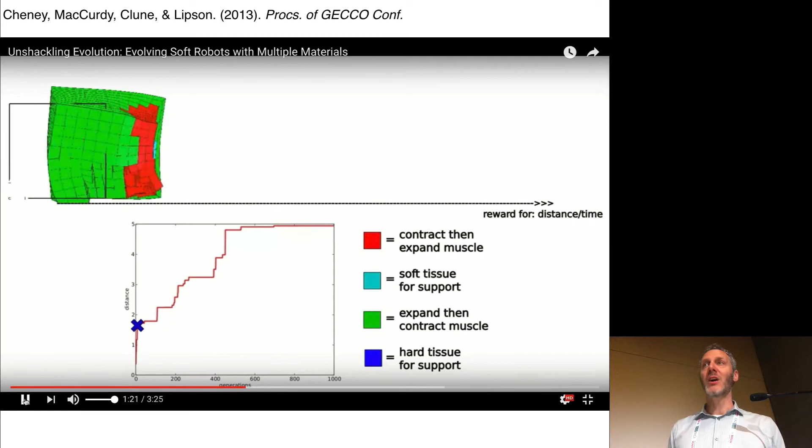In all the work you're going to see here, we work in simulation. This is the VoxCad Simulator, and as you can see here, VoxCad takes a finite element approach to simulating soft robots. Robots are simulated as aggregations of 3D pixels or voxels. In this early experiment, each voxel belongs to one of 4 types. You can see the red and green voxels here. These voxels are controlled by an open loop controller that oscillates the volumes of red and green in antiphase. So these are kind of like muscle.

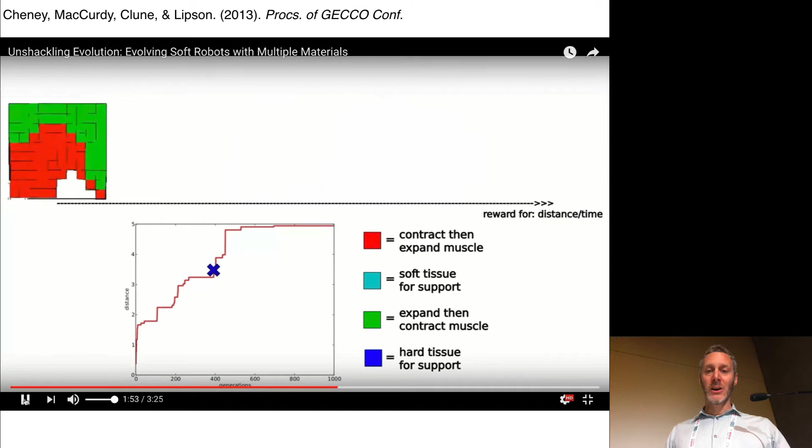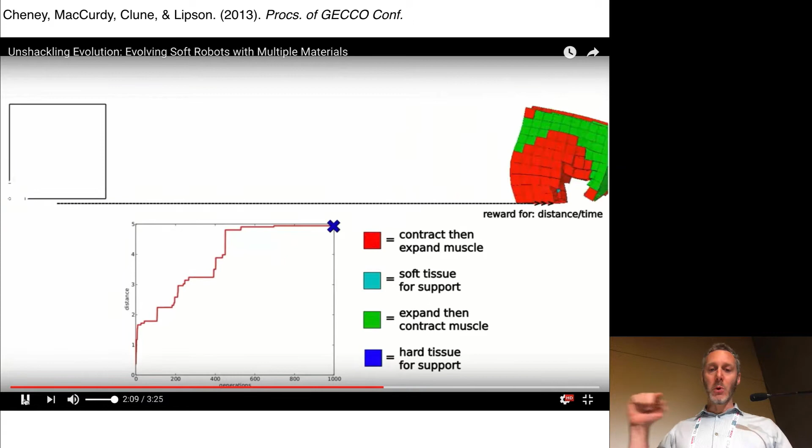If you look carefully, you'll see a light blue voxel, which is passive soft material, the robot analog of fat. And if you look carefully again, you might see in a few of these robots some dark blue voxels, which is passive rigid material, the soft robot equivalent of bone. So what you're watching in this video is a snapshot throughout this evolutionary process where you see the best robot in the population at any given time.

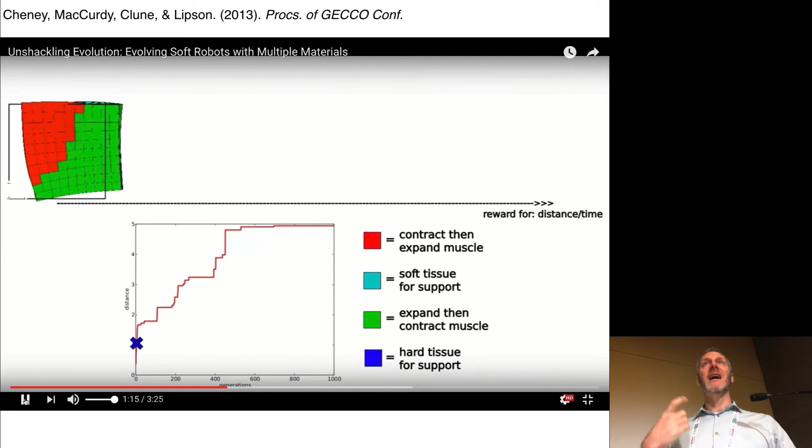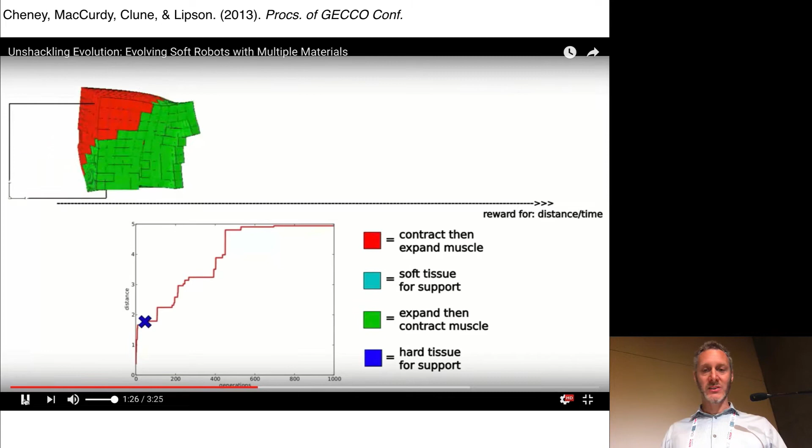So we have a population of these machines, and the evolutionary algorithm is designing the geometry and the distribution of material across the body plan of these robots. And I'll talk a little bit more about how this works in a moment. So that's evolving soft robots, as Fumio mentioned. And also, like Fumio showed you, how do we move forward with this idea of protean machines?

So evolutionary robotics usually gives us changes in morphology and control over evolutionary time, but any one robot usually has a relatively fixed morphology and controller. So how do we evolve protean machines, machines that themselves change morphology and control over their lifetime?

Well, as always, Mother Nature has already figured out how to do that, and she does that using the process of evo-devo, which is short for the evolution of development. So in nature, evolution doesn't produce a fixed blueprint. Evolution dictates how a morphology grows from an individual cell into a multicellular organism.

And in evo-devo, you can then look at an evolving population at 3 different time scales. You can look at the second or minute time scale and describe the biomechanics or the learning of a machine, how it's actually coordinating its behavior in its ecological niche.

At the middle time scale, you can watch the lifetime of an organism or a soft robot, as you'll see in a moment, and describe how the morphological and nervous control, the neural system of that organism changes over its lifetime. And then finally, at the evolutionary time scale, you can look at how evolution changes the developmental trajectory of organisms. So we have behavior, devo in the middle, and evo at the bottom level.

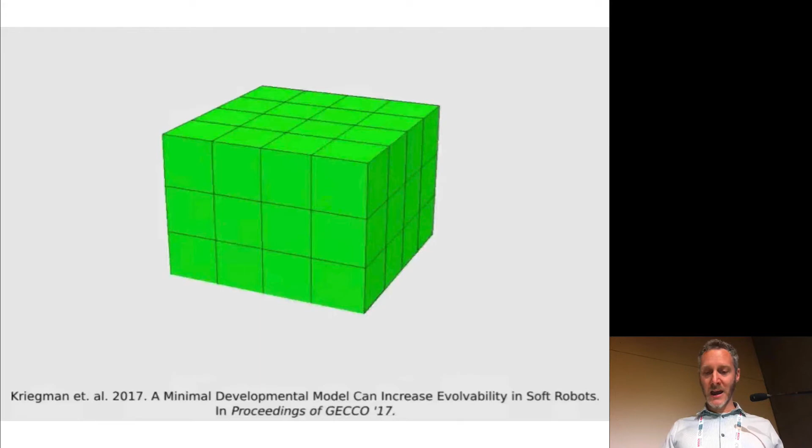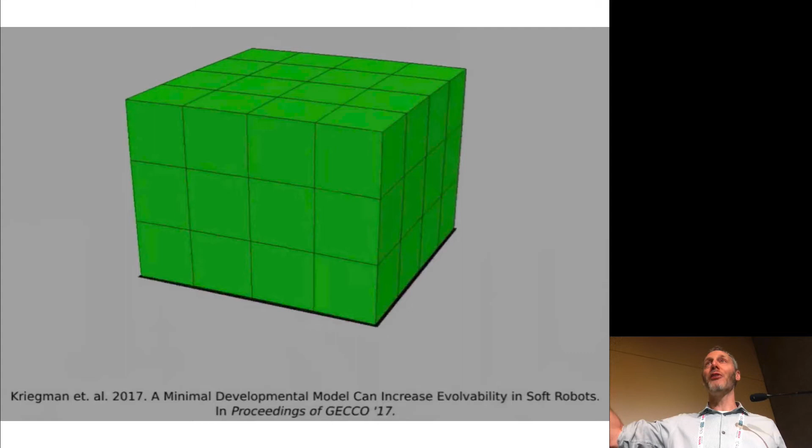The simplest thing you can do is start with a set of voxels, and then we use an open loop controller, where in this case, all of the voxels are expanding and contracting in phase. So we have a fixed open loop control. This is the here and now time scale. As you can see, with just this morphology, this robot doesn't do a lot.

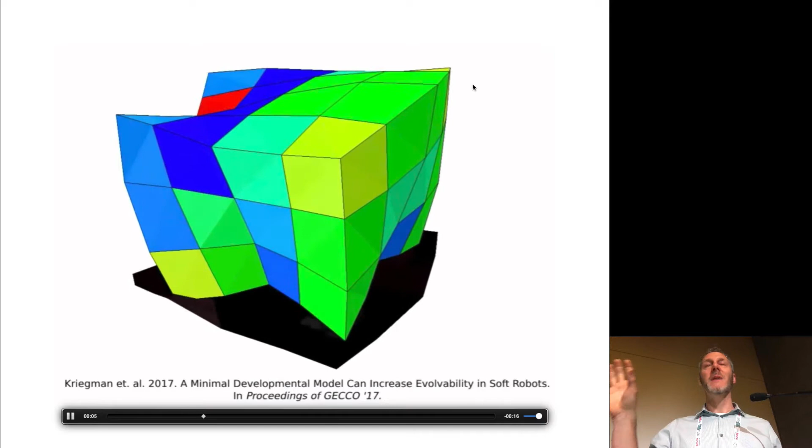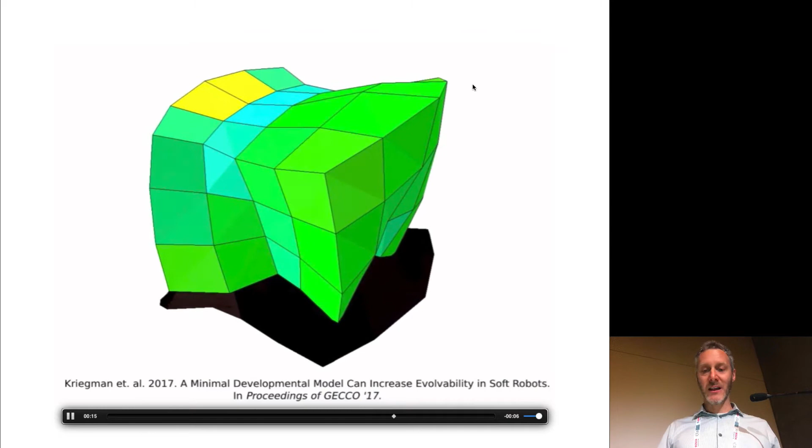We then paint on top of that a developmental trajectory. So in this case, you can see that some of the voxels are expanding and some are contracting. So this robot is growing or developing over its lifetime. If we take the open loop controller and combine it with this developmental program, you'll get the following.

You can tell that this is a robot that was evolved for forward locomotion. If you watch carefully, you'll notice over the lifetime of this robot, there are short periods in which the robot moves quickly and short periods in which it moves slowly.

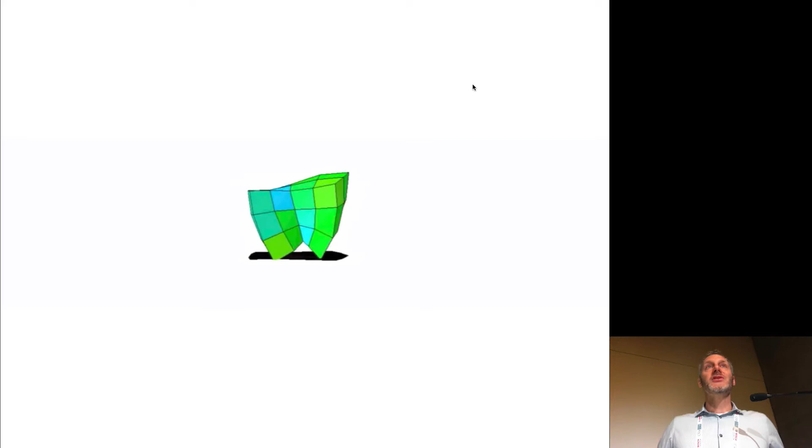So we've combined 2 monotonic processes, the constant frequency of the open loop controller with the constant expansion and contraction of the developmental trajectory. And by putting those 2 monotonic processes together that operate at different time scales, I'll just start this video again, you get positive interference.

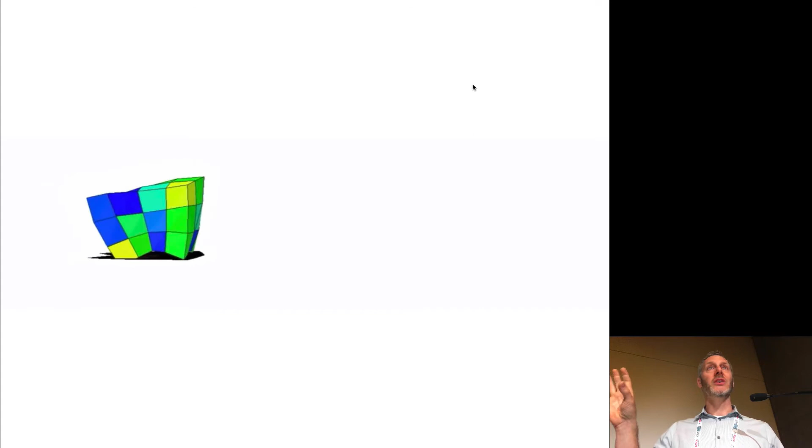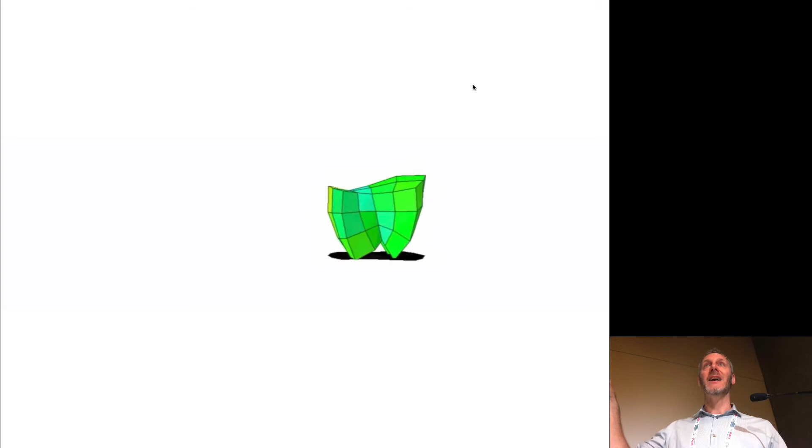There are periods during which those 2 timescales synergize and the robot goes quickly, and other periods in which there is negative interference and the robot slows down. Why does that matter? It matters because usually when we're evolving these robots, we're looking for a needle in the haystack. So we're looking for a very small subset of the entire space of robots in which that robot can exhibit the behavior of interest. In this case, it's rapid locomotion.

If you have a robot that's changing over its lifetime, if you have a machine that's protean, you have a much higher likelihood of passing over the needle in the haystack. You're much more likely to produce a robot that, at least during part of its lifetime, exhibits the rudiments of the behavior you're after. It might lose it, but as long as it shows up for a short period of time, evolution can then subsequently mutate descendants of that robot and expand the period of time during which the needle, so to speak, is exhibited. So that's why Devo is useful.

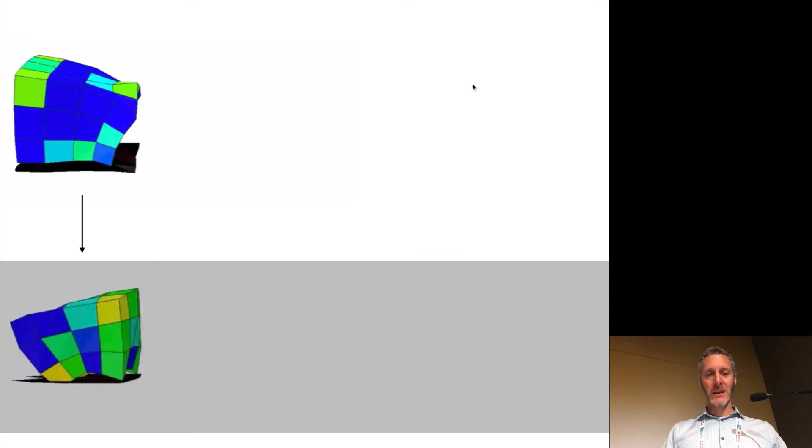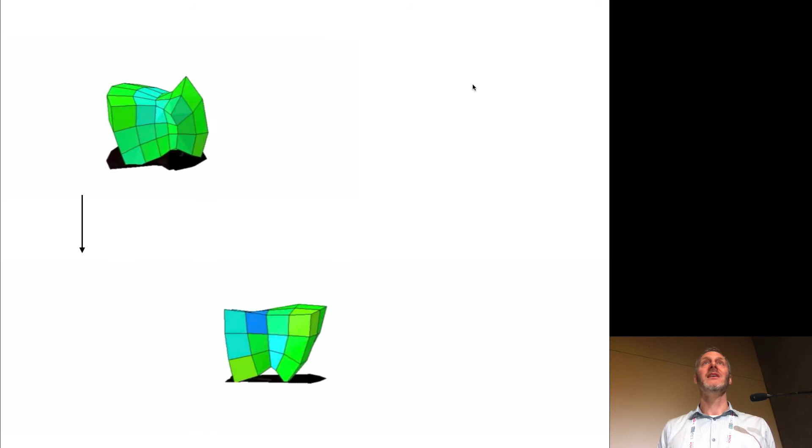I'm now going to go to the third time scale, evolution. So you can see in the top row here, this is an ancestor, and you can see a descendant of that ancestor in the bottom row. The only difference between these two robots is they have different Devo. They have two different developmental trajectories. In the top case, the needle was discovered. There was a short period during which the ancestor moved quickly. And in the descendant, that particular body plan that gave rise to rapid locomotion has been lengthened throughout the length of the lifetime of the robot.

I'm going to show you a second project now. This is more recent work by Francesco Corucci and Cecilia Laschi. This was a collaboration to extend this idea. In this case, every robot is made up of two CPPNs. Remember that a CPPN paints regular structure inside of a space. The first CPPN is going to paint the morphology, the geometry and material properties of the machine. And the second CPPN is going to paint a controller onto that robot. In this case, we still have a relatively simple open loop controller. It's going to paint a particular frequency and phase offset onto the active parts of the robot.

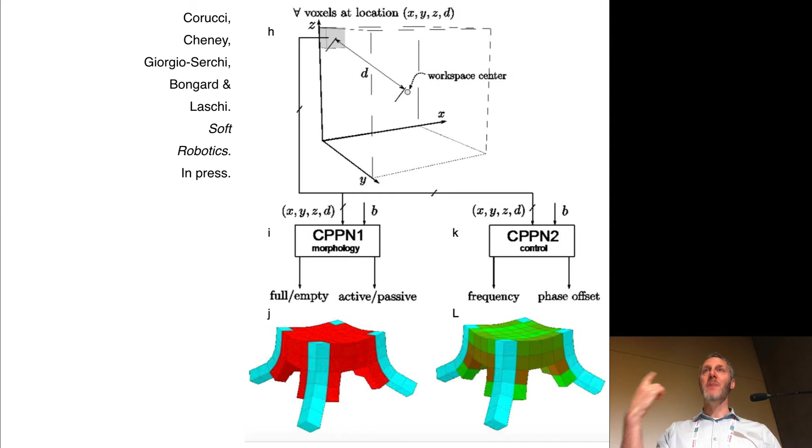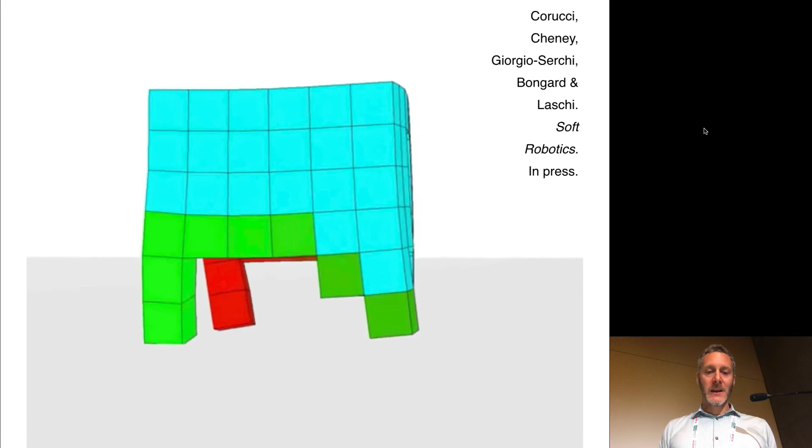In this simplified case, the red voxels are going to be active parts of the robot, and light blue is passive soft structure. Okay. This paper is currently in press at the Soft Robotics Journal. It will be out shortly. Here is one evolved robot. You can see that the majority of this robot is actually passive structure. You can see now the patterning of red and green is showing the phase offset of the open loop controller. You can see that the minority of this robot is active material.

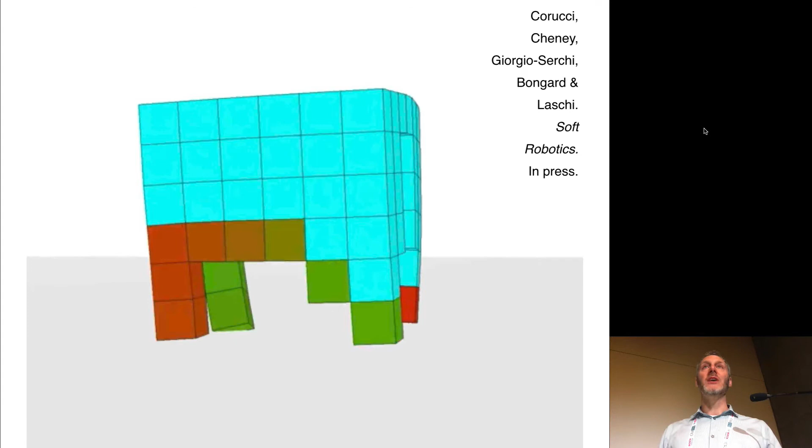So this is in some way the soft robot equivalent of passive dynamic walking machines, if you remember those, where basically evolution is again exploiting the morphology and the material properties, in this case, to achieve quadrupedal locomotion with relatively little and simple control. Okay, so we now have a robot that's changing morphology and control.

I'm going to move on to the third project now, which is, again, a more recent application. This is work together with Sam Kriegman again and Francesco Corucci from Cecilia's lab. When I showed you Devo before, I was showing you what's known as ballistic development. Ballistic development means that the developmental program will unfold in the organism or the robot, regardless of what's going on in the organism or robot's environment.

In this third and final project, I'm going to show you environment-mediated development, which means as the robot performs its behavior in its given task environment, environmental signals can change the way the robot develops, which is the sort of standard way development occurs in nature.

So how did we switch from ballistic development to environment-mediated development? We made a very small change to the previous project. Again, each robot is designed by a morphology CPPN and a control CPPN. In this case, we've added a third output neuron, again, to the CPPN that paints the morphology.

This third output neuron is going to paint a coefficient onto an ordinary differential equation, which you see in the bottom left. And this ordinary differential equation is going to dictate for each voxel how its stiffness changes in response to stress, engineering stress in this case. The coefficient is going to dictate how that voxel changes its stiffness in response to stress.

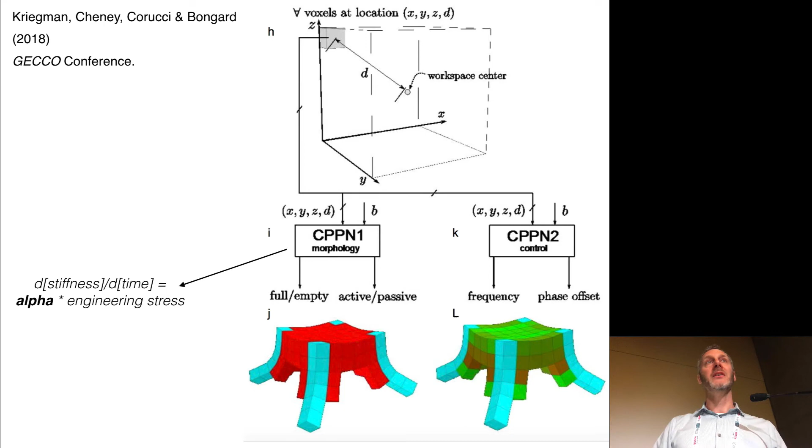So in essence, what this third output neuron is doing is painting different coefficients in a set of ODEs distributed across the body of the robot. Okay, so I'll show you now a video to show you how this works. We're going to be reporting this work next month at the Evolutionary Computation Conference, GECCO.

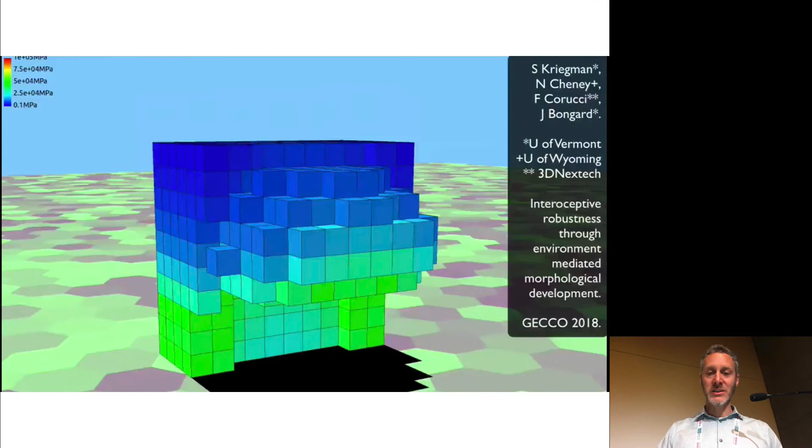In this video, the color is going to indicate at that given time the stiffness of that voxel. And you can see already at the beginning of the lifetime of this robot, there's already a continuum or a gradient of material properties across the robot's body. In this video, watch the front foot, if you like. It starts relatively soft, and as it moves, that part of the body becomes stiffer.

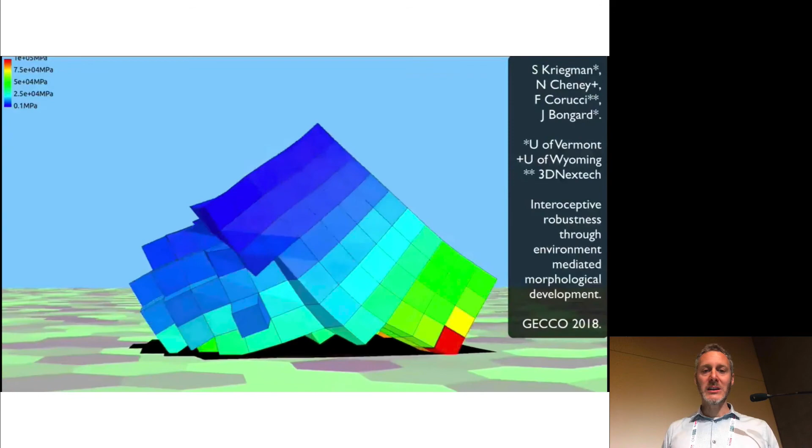And it turns out that for this morphology, there is much more engineering stress at that point than at other points in the body. And that voxel has evolved a positive alpha, meaning that it stiffens in response to increased stress. Elsewhere in the body, you'll see, particularly at the top of the body, there is a lot of soft material, and the robot is in essence sort of literally throwing its weight around as it's moving. So there's relatively little stress at the top of the body, and that part of the body softens.

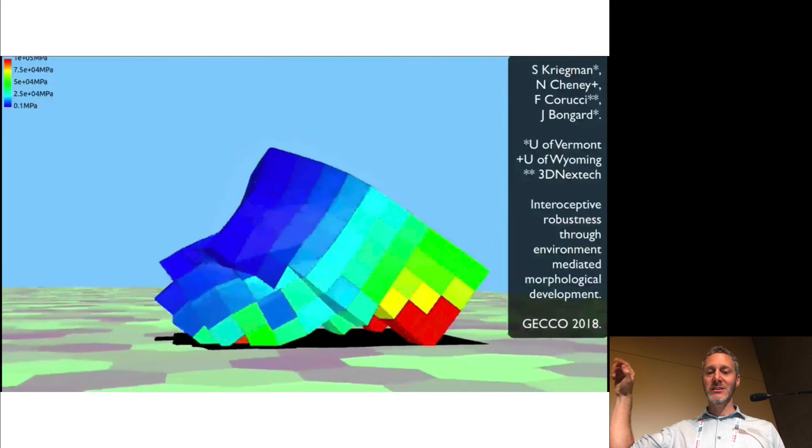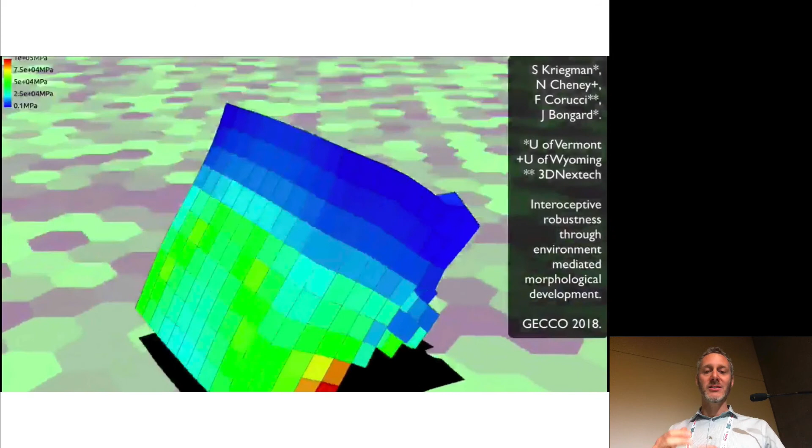If you look at the feet again, you'll see that the two front feet and the single back foot are continuing to stiffen. So in essence, it's building stiffer feet and using the soft upper part of its body to make its movement more energy efficient. So something like a flexible spine in the robot. So at different parts of the body, there are different changes in material properties, and this is all within one robot. There are other robots in the population that have evolved different developmental trajectories.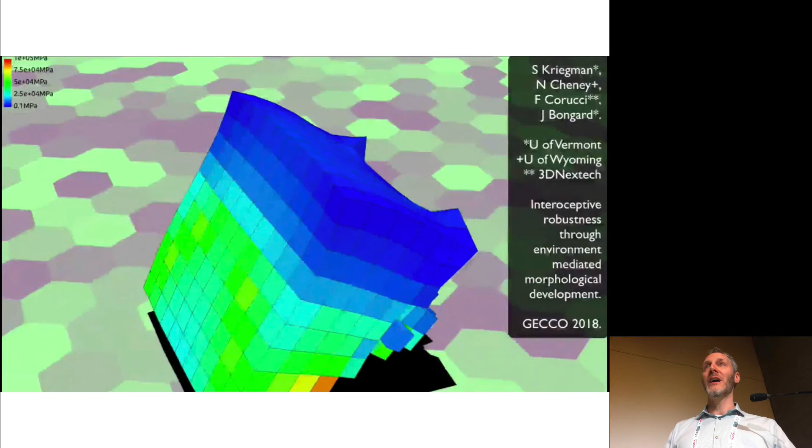So although relatively simple, we have all the basic pieces of Evo-Devo in here now. We have evolution dictating how a robot develops or changes its body in response to environmental signals.

Okay, all of this work, we've now put this up in a GitHub repo. My student Sam Kriegman has evosoro. You can go check out the GitHub repo. For those of you that are interested in simulating and evolving soft robots, this is a relatively easy way to get started before you move on to hardware. We've just put up this repo, so we'd love to get some feedback on it. Please do let us know whether it's useful for your projects.

Just to sort of summarize now, I've tried to argue for this idea of protean machines, where we focus on what the robots can do, which is change their form, and what opportunities that gives those machines beyond non-protean machines, which is that they can change their function more easily because they can change their form more easily. I've shown you some protean machines that can change their geometry. Here's another one that evolved.

This one is changing its geometry as well, and by doing so, it changes from a walker into a roller. So this is not a walking machine, it's not a rolling machine, it's a protean machine. As it changes its body, it's able to exhibit different behaviors under different conditions. We could also, for example, change the topology. We can connect or disconnect these machines together, somewhat similarly to what Fumiya showed you.

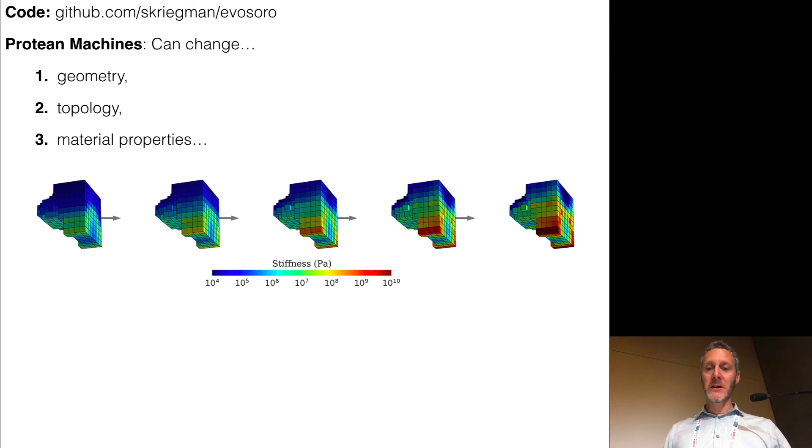This has been the goal of modular robotics for a long time. So we can also change not just geometry, but also topology. We can change the material properties, as I just showed you. This is a robot that grows calluses on its feet. And of course, we can also change the control of the robot.

Up to this point in robotics, it's been very difficult to change morphology of physical machines. So there's been a lot of emphasis on optimizing controllers for fixed morphology robots. One of my hopes for the field of soft robotics is as it becomes easier to change the body of soft robots, either in simulation or reality, we can broaden our thinking about adaptive processes from just learning to development in general.

What are some of the opportunities and challenges? By incorporating development, or this protean nature, it actually makes it easier to evolve these machines. Recall that this machine is evolved and it's speeding up and slowing down over its lifetime. So those slight and intermittent increases and decreases in fitness provide a lot of rich material for evolution to work on. For most robotics applications, what we want the robot to do is a very, very small subset of the entire design space. And by incorporating development, we make it easier for evolution to find those needles in the haystacks.

An opportunity, I think, for the field of soft robotics is to really convince our non-soft robotics colleagues that there really are things that protean machines can do that non-protean machines cannot. This is, again, some work together with Nick Cheney and Hod Lipson. We published a few years ago, demonstrating evolving soft robots to escape through very small apertures.

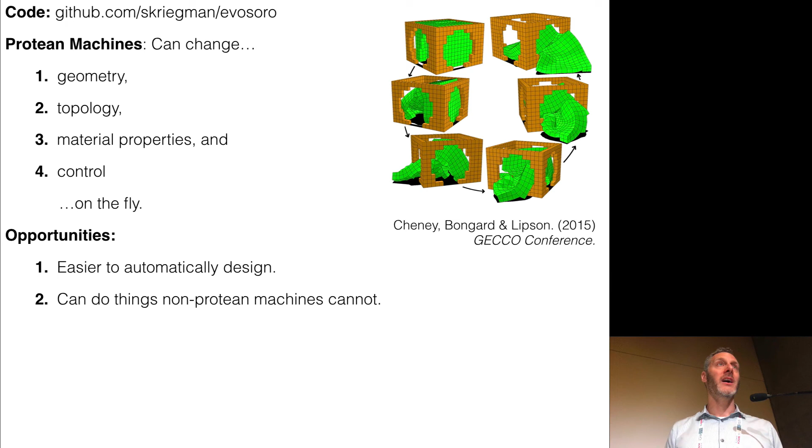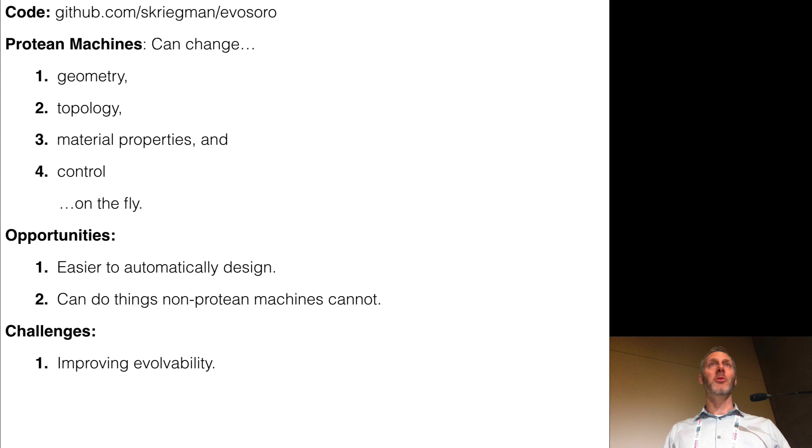A challenge here is to, again, improve evolvability. I've argued that Devo helps, but we still have a long way to go. As Fumiya mentioned, we need to perform a lot of evaluations to find or discover a robot that does what we want it to do. There's a lot of work to be done on the evolutionary algorithm and machine learning side of things to more efficiently discover useful soft robots in the overall design space.

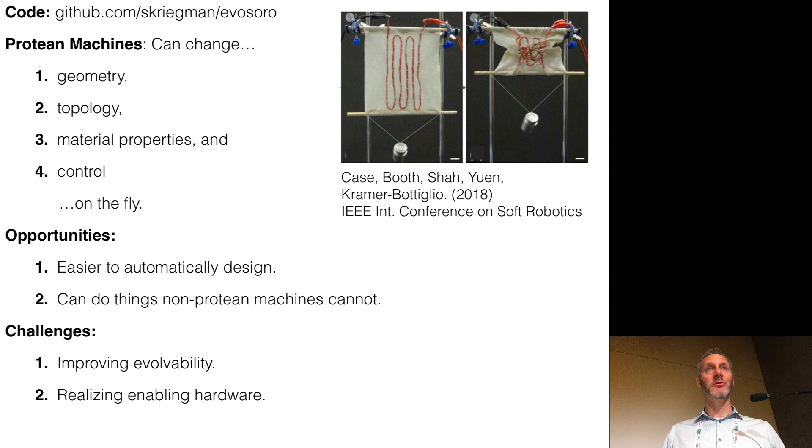Realizing these simulated robots in reality remains a challenge. This has been a challenge for a long time in robotics, known as crossing the reality gap. We recently started a funded project with Rebecca Kramer-Bottiglio at Yale to transfer some of these simulated robots to her robot fabric approach. Again, there are multiple hardware instantiations that could realize some of these simulated machines, but how to do so and how to do so well remains an open problem, and I think an interesting challenge for our field as we move forward.

One approach to this that I've worked on in the past is the idea of actually reverse engineering a simulator. In previous work, we did this with traditional robotics. We have a physical machine, and as it's behaving, it's generating sensor motor data. We take that sensor motor data, feed it back into the simulation, and evolve simulators to more accurately reflect reality. So this video is kind of a mashup of these two processes. I'll play it again for you. As the physical machine is operating, you can see that the simulator is being evolved to better match reality.

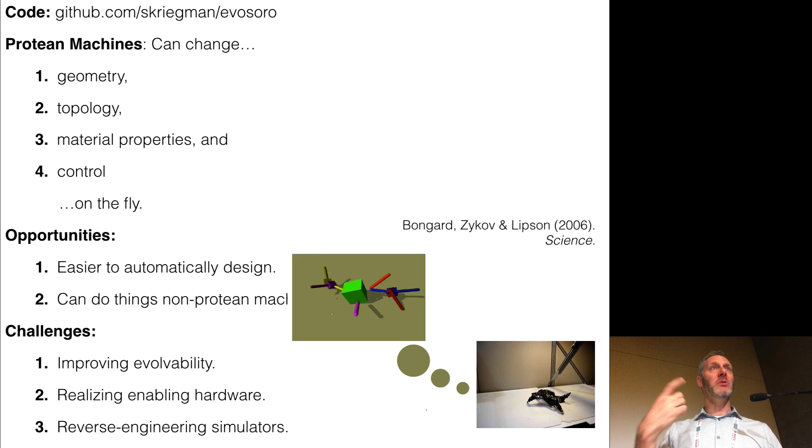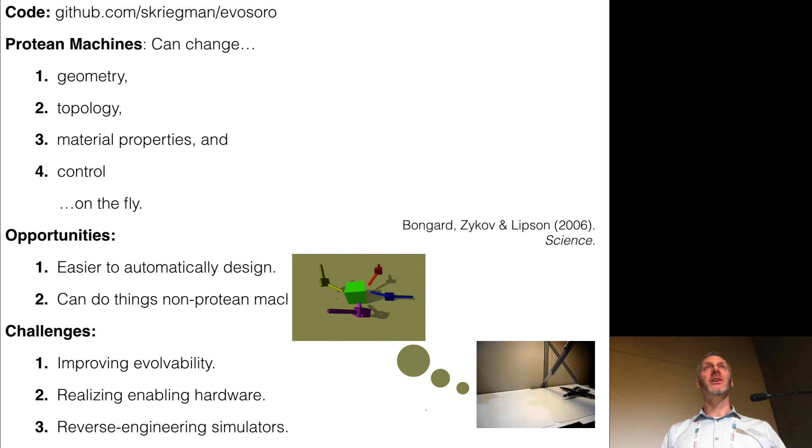Can we do the same thing with the VoxCAD soft robotics simulator and other soft robot simulators? As an alternative to evaluating every robot in reality, I'm hoping there's a place for simulation in the field of soft robotics, but closing the reality gap remains an open challenge.